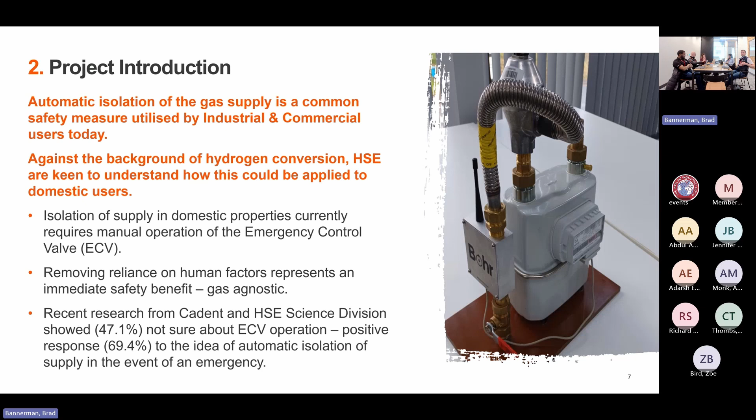So yeah, enough from me. I'll hand over to Dan and the team to take you through the rest of the slides. Yeah, Shani is going to kick us off with what is HyBreak? Great. Yes, thank you, Brad.

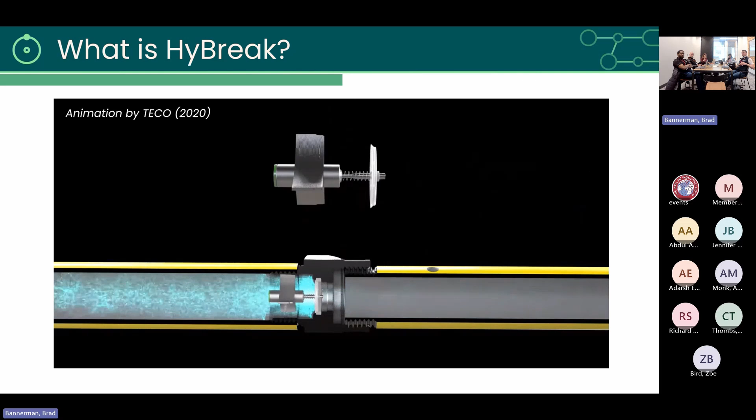So as Brad mentioned, with the transition towards renewable gases like hydrogen, we need to ensure that the infrastructure related to gas safety is ready. There are gas safety devices in the market, but most of them are passive or just mechanical. I'll come to the animation in a couple of seconds. So that's why this HyBreak project is there, because it was born due to the need to rethink gas safety in a digital, a modern and a proactive way.

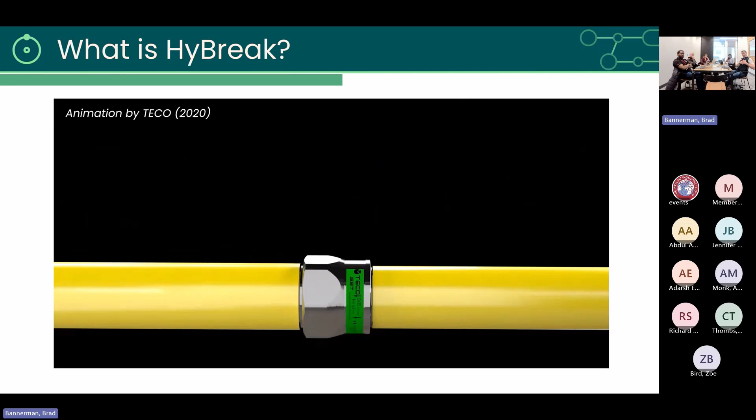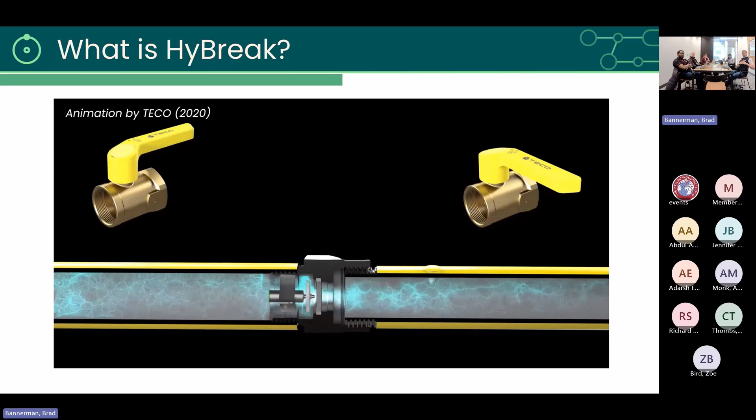So I would say HyBreak is an evolution of an excess flow valve. If you don't know what an excess flow valve is, it's basically a mechanical safety device that shuts off gas flow when it detects a sudden rupture or a large leak. One of the manufacturers of these excess flow valves is called TECO. And here you can see an animation of how an excess flow valve works.

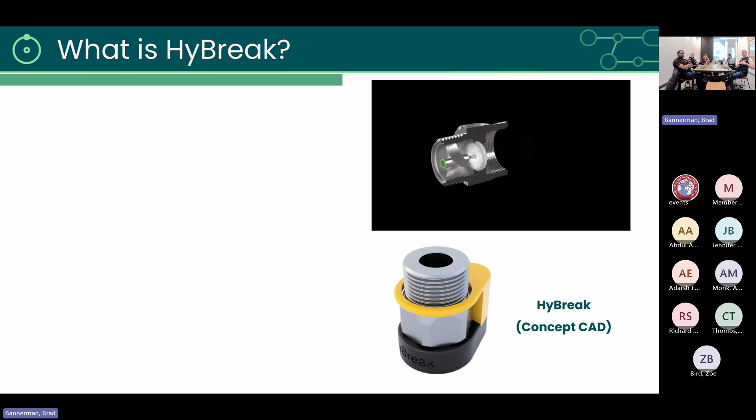So if it detects a very high gas flow that it's designed at, it automatically shuts off and it prevents damage happening to the system. But let's say the problem is fixed and the pressure is back to normal, then the valve quickly reopens. So it works fine, but the whole idea is, this valve is purely mechanical and it's passive. So that's why we have HyBreak.

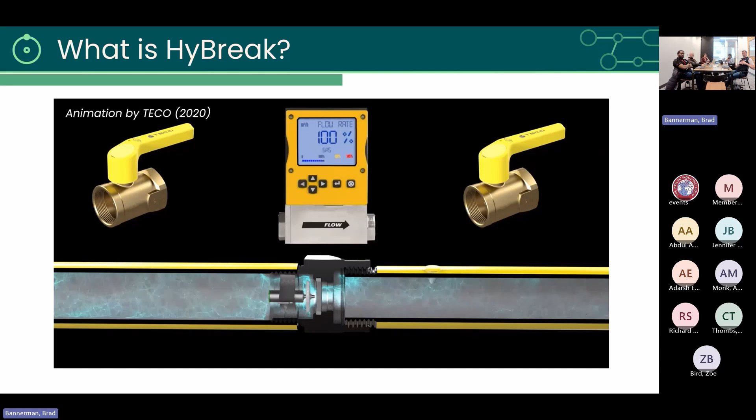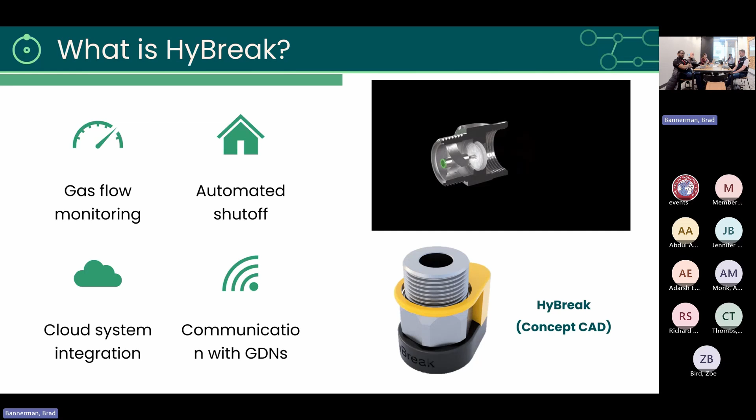So HyBreak is all about actively monitoring the gas flow, and it automatically shuts off when abnormal patterns are detected. And also it's a digital safety system which integrates cloud-based systems, and it can remotely connect with gas distribution networks and give alerts and alarms. So it's a whole digital package which automatically aligns with the gas safety system. So that's what the HyBreak project is about.

If we talk about the benefits of this, like we were saying just now, most of the current safety systems are reactive and they do their job, but it happens only after a significant event. So that actually leaves a safety gap.

That's the gap the HyBreak valve is trying to fix, because it brings in that proactive safety, and it's capable of detecting unexpected patterns before it actually escalates to a bigger level. And this project also supports the smooth transition into renewable energy.

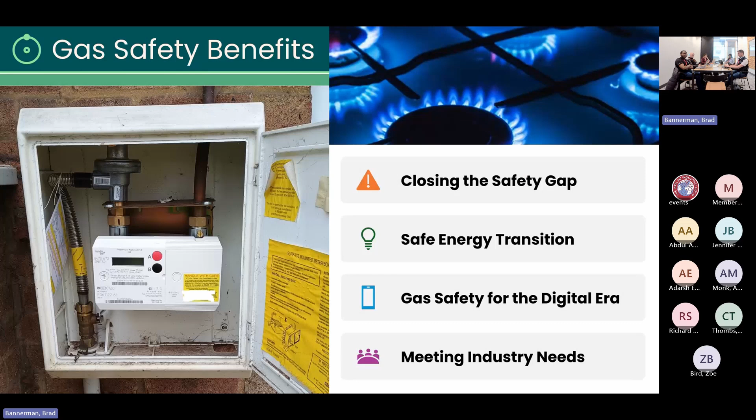And like I said, we use sensors, we use wireless technology, so we are kind of moving into that digital era. And it's that whole package which has wireless connectivity and everything. It also meets industry needs and industry standards. And we can say that HyBreak delivers at an affordable cost and it's scalable in the future as well.

So the project is NIA funded, and it's commissioned by Ofgem. So through Energy Innovation Center, we have been working closely with NGN, Cadent, GNI, and NGM.

Just to quickly summarize the key functionalities of this valve that we are developing, it monitors the gas pressure and flow rate, and it responds to various safety scenarios. It can detect excess flow scenarios or insufficient flow, and it responds automatically to those scenarios. And it also provides that convenient way to turn off gas without needing to access an emergency control valve, which is specifically good for vulnerable customers.

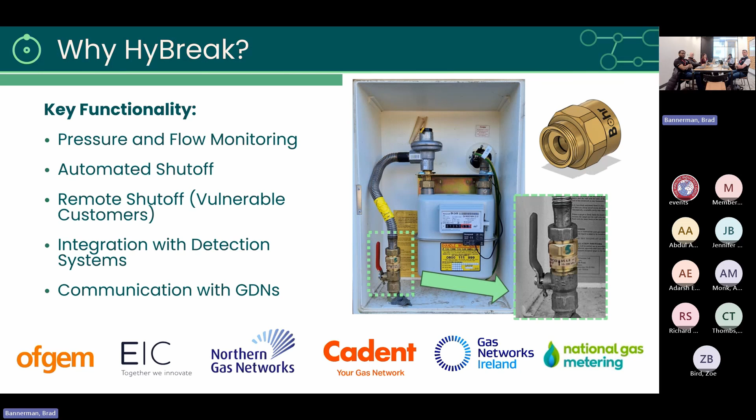And it has a detection system, and we can connect it to different systems like, let's say, a flammable gas detector. And like I said before, it sends alerts and gives alarms. So the distribution networks are communicated on different aspects of it.

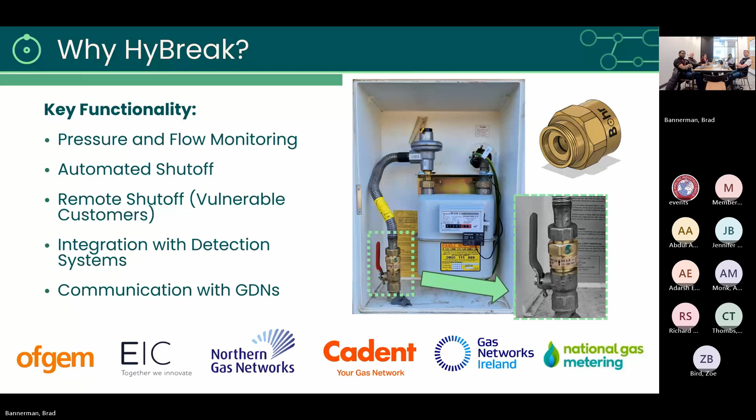So why is HyBreak a strong solution? Yes, it is proactive. Unlike the gas safety systems in the market, it actually is a proactive solution, and I would say it's a whole package. We are designing it with a 5-year battery life. So there is no ongoing maintenance, which of course reduces costs and minimizes disruptions in the gas networks.

And in the future, of course, it can work with different varieties of gases. It can work with natural gas, hydrogen gas, or a blend of both. It's easily retrofittable. If you can see in the picture, it's designed to integrate with the existing infrastructure. It connects to the end of the emergency control valve. So that means the networks don't need to take apart their whole system, but that upgrade can be done quite fast and easily.

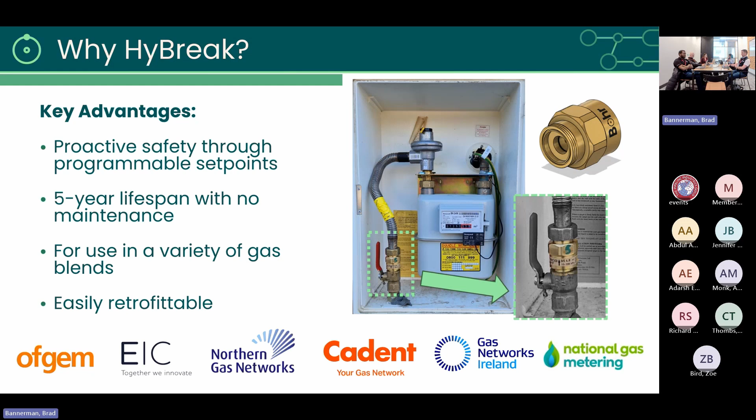That prototype you see in the picture is one of our early prototypes. And at the moment, we are at a significant level in this project. And I have to say, a lot of design thinking, testing, iteration, and lots of prototyping has gone into the project so far to ensure that we deliver this whole package of gas safety system. Yeah, and we will move on to the project approach and how we got to this point.

Thank you, Shadi. So I'm going to go through team and project management. You're already familiar with most of us here in the room. We've got Dan, who's not with us today. He's our digital and IoT lead. He's helping out with a lot of the wireless communication aspects of the project.

Like I said, a lot of what I do on the project personally is project management. I work a lot with Matt, who's our technical lead on the project. And Abdul is doing a lot of product design and development, and then Shadi was helping out, doing a lot of the technology assessments.

So where did we come from? Where did we go? To explain what the timeline of the project is. The project commenced at the start of 2024, where we did the technology qualification process. As part of that, we followed DNV's technology qualification process, where we risk assessed the technologies on the project.

So the first thing was the qualification basis, where we researched relevant standards and regulations that were important for the project, and that helped come up with our technical requirements. The top two standards are particularly relevant: PAS 4441, which is components used in hydrogen gas metering, as well as the German DIN standard for excess flow valves. These were really important for the project to define things like closure flow rates and how we carry out our monitoring processes.

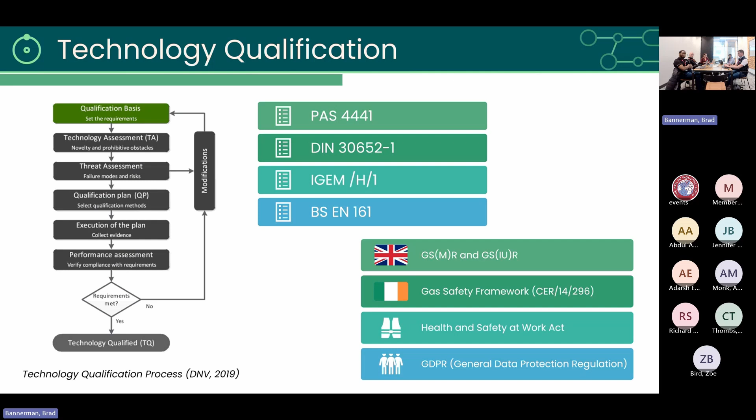From a regulatory perspective, we had to make sure that we complied with gas safety regulations, both in the UK and in Ireland, as well as health and safety at work and GDPR data protection laws.

So yeah, please don't try and read that. It's very small, but just to show you the risk assessment that we did for the technologies on the project. So we did it for all the technologies that were considered novel. We didn't develop any new technologies, so sensors, batteries, they already exist, but it was all about the application. So things like sensors, batteries that have not really been used in this sort of application before.

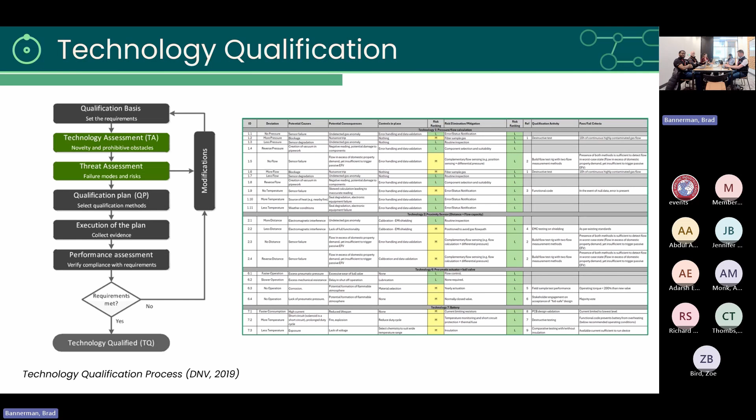So we did a HAZOP and a HAZID, all to assess the risk of implementing the technologies, which then took us to planning and executing a variety of different experiments. And these were all to test the mitigations from the risk assessment. So we put sensors through grit and we tried to blow up batteries, all to test the limits of the technologies.

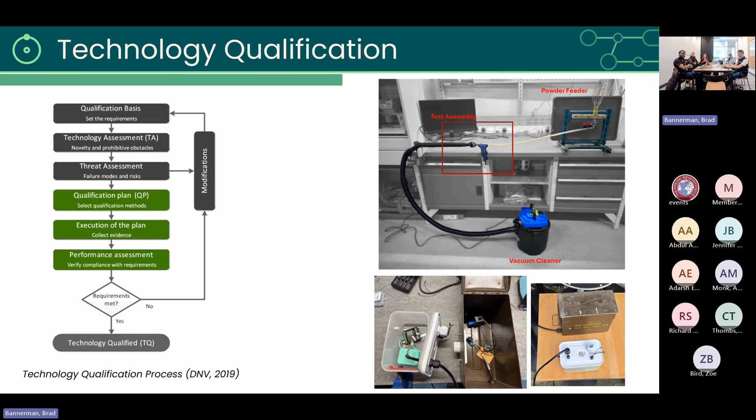So you can see at the top, we put some sensors through grit using a vacuum cleaner to simulate the abrasion caused by the sensor being exposed to 5 years in the gas stream. And then at the bottom there was a setup to test the explosive properties of different battery chemistries and compare them against each other. And these tests were really important to ensure that HyBreak is de-risked, especially when we go into deployment, so that the GDNs can deploy them confidently.

The next stage of the process is the product development process, which is where we're currently at the moment. So the product development is separated into 6 distinct milestones, all based on different product functionality. We're currently in the 4th development milestone, where we've just delivered how to authorize the valve to be commissioned and decommissioned, and we're currently working on implementing wireless technologies.

So I'm going to move on to project variation, which is one of the challenges that we have to adapt to on our journey on this project. So we carried out a big scope change in October of last year. To give you a bit of background, the HyBreak was originally designed with the Redcar and the Hydrogen Village trials in mind. And if you don't already know, these were cancelled last year. So that led the scope of the project to be revisited.

So for this, we all presented and participated in workshops with the GDNs. We prepared a change request document with different potential scope changes, and that allowed all the stakeholders in the project to make an informed decision. And one of the biggest changes that came out of that whole scope change was a restructure to the project, which includes shifting the product development that I showed earlier from a waterfall project management approach to an agile project management approach. And I'm sure you've all heard of agile, and it's more than a buzzword.

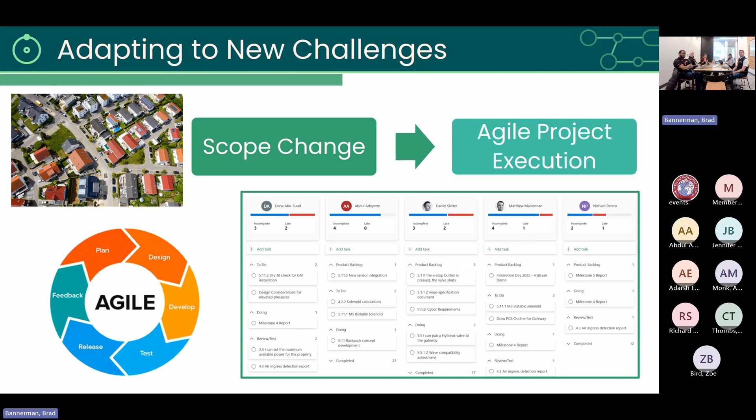So to replan the project into agile, we broke down all the functionality to separate it into those milestones that I showed earlier. And as project manager, I've implemented a variety of agile tools. So on the screen is a Kanban board. We also do things like sprint retrospectives, where we look back on the lessons learned from sprints. We sprint plan at the beginning of each sprint to set clear objectives for what we're going to be doing. So we're currently operating on a 2-week sprint basis. And yeah, I'm going to hand over to Abdul to explain the product development.

Yeah, thank you very much, Dana.

So starting off, we had a rough prototype in mind. We actually had lots of ideas and different concepts in mind, and we sat through that and came up with the very first prototype, which is the solenoid system. And then we had the RFID.

The RFID and a microcontroller to control the whole system, and a simple dashboard to see what's going on with the solenoid. And then below that picture is the pressure sensors. So we have the two different pressure sensors which we could use to monitor the pressure difference in the system. And then using that pressure difference, we could have different logic that can control when the solenoid will go on and off, depending on if there's high pressure or low pressure, and that gives us a reactive advantage over other things in the market.

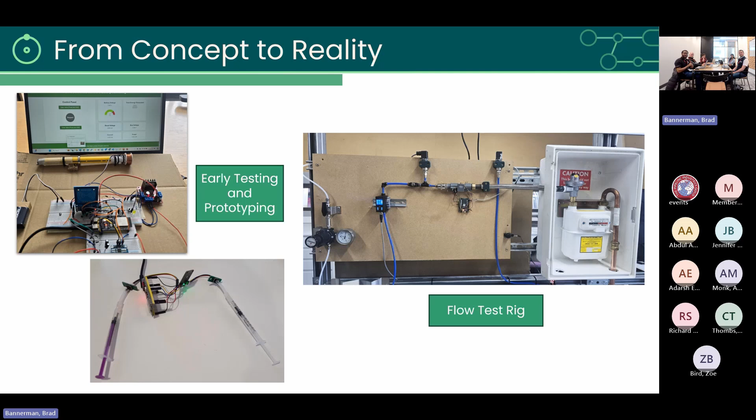And then to the right, there's the flow test rig, which allows us to test the entire system end to end, so the pressure sensors, the solenoid, the microcontrollers, etc., and flow meters in a simulated environment. And then in the next iteration, we had a stacked flange system. So that's basically different slices of the different technologies we hope to integrate into HyBreak. So the pressure sensors, the solenoid, and the pressure sensors. This allowed us to see what works.

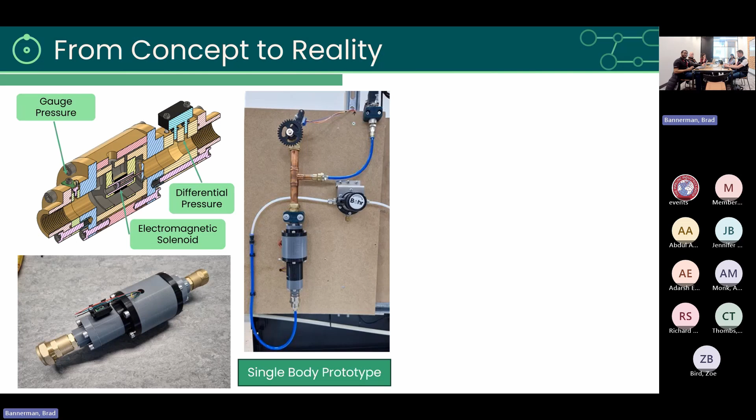What didn't work, we remove the slice out and replace it with a different slice to ensure that we have a more robust system. And below that picture, everything's fully 3D printed. So 3D printing allowed us to prototype all of the parts, and we have all of those different slices stacked. To the right of that is the single body prototype, also in the test rig, and above that is a needle valve controller, and that allowed us to control the flow of the gas, using the pressure regulator on it. Finally, we hope to combine and compress all of those into one final and pretty easy to integrate device that can go into the homes.

So where did we come from and where are we going? So like Dana said, we are already in Q2 2025, and at the end of the project in November, we hope to have a product at TRL 7 at the project closeout and ready to be installed at the GDN test facilities. Still to come.

So what's the future? What's next? We can't talk about all of this without talking about AI integration. So how are we going to integrate AI, you might ask? Previously we started off with an EFV which was reactive, does its work passively, and we moved on to being proactive, having pressure sensors and having the logic of when to go on and off. And in the future, we hope that it becomes predictive, where if we gather enough data, we can forecast when maybe there's high demand, or maybe the solenoid system is overheating, or we can forecast any failures and schedule maintenance.

And for standards and best practices, we hope that HyBreak becomes so revolutionary that it shakes up the standard system in the UK or even worldwide, and allows us to come up with even more practices to ensure that the system becomes more safe. And we would like for it to have a digital aspect, perhaps a digital twin of the whole system. And we hope that the UK transitions to a net zero future. Yes. Right.

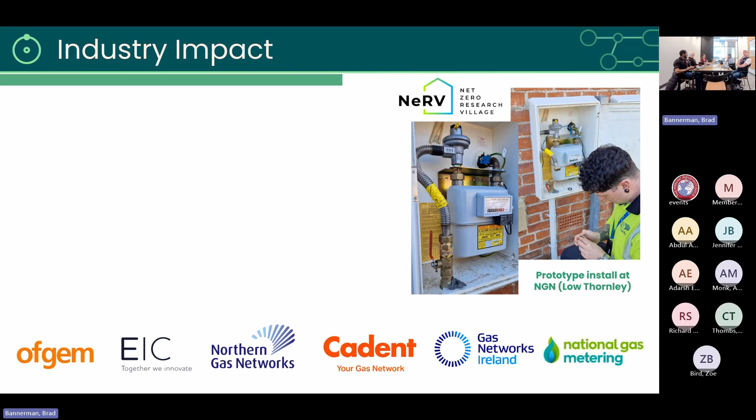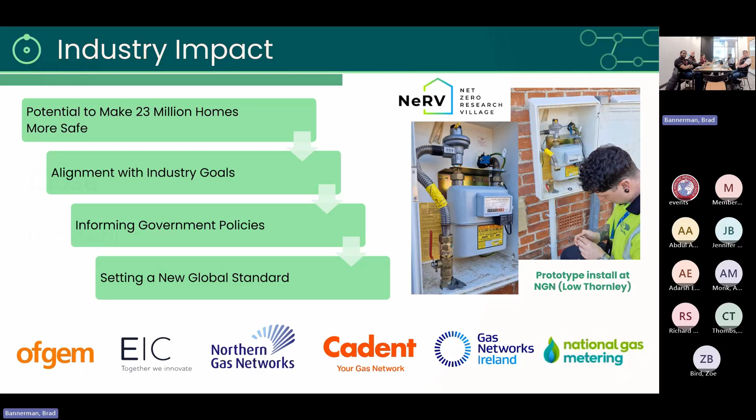So Abdul said where we are at right now. We want to say that HyBreak is already gaining support from key players. Like you see in this picture, we recently installed one of our early prototypes at the NGN facility. It's a net zero research village. So if we continue to roll out HyBreak, it has the potential to make 23 million homes safer. And of course, it aligns with the industry goals, like we said before, to move into renewable gases and renewable energy in the future. And it supports the government policies.

And according to our knowledge, a product like HyBreak is not yet being deployed anywhere else in the world. So it's not just in the UK, but I think this project is setting a new benchmark for gas safety worldwide. So that's the impact we see from the project.

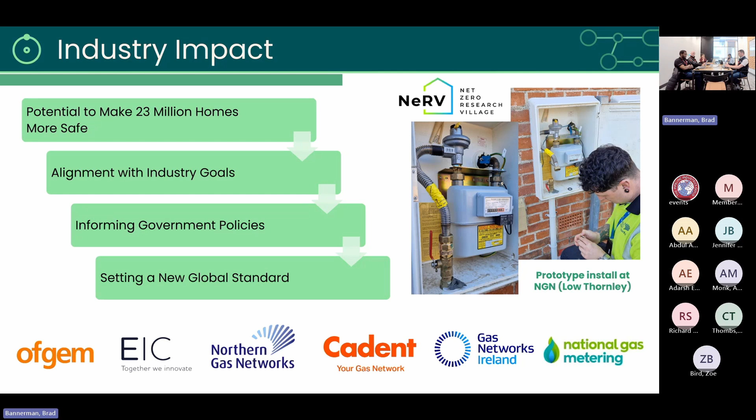Okay, thanks. I'm just going to round up the presentation. So let's just summarize. Hybrid addresses key aspects like gas safety and gas network digitalization. We have to make sure that safety systems evolve, especially as we transition towards renewable gases and renewable blends. There are still hundreds of incidents caused by gas leaks every year. And solutions like Hybrid are really key to making sure that safety and efficiency remain at the forefront of the industry's ambition towards achieving net zero. Through digitalization, we also enable this transition to be done in a smart and resilient way, to enable the gas networks to have a smart and resilient energy future.

We're not just adapting to the future. I guess that's the other exciting thing, is that we're sort of shaping the future. And as we transition to renewable gases, like I said, we can do that confidently.

The project is largely centered around product design and product development, with a lot of aspects like technology selection, risk assessment, prototyping, and testing both on the bench and in test rigs. We do that using an agile delivery approach, which allows us to rapidly make changes. And we faced some challenges, because one of the challenges with agile was that it is quite a flexible approach within quite a rigorous project.